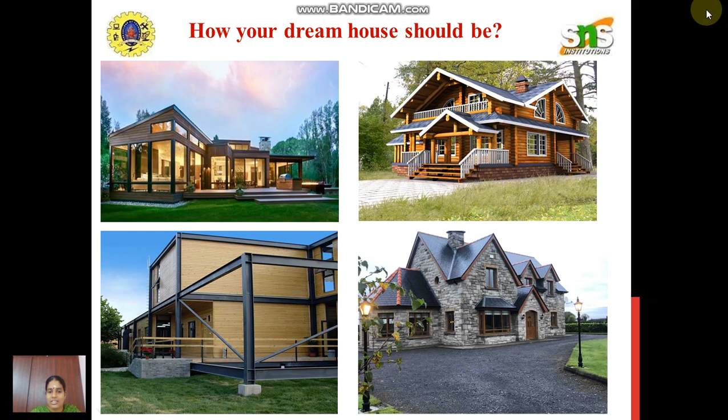Before finalizing your rooms and the size of the building, you should buy the land. For each and everything, you should know what materials are available in the market, and which are affordable for us or not. So for that, we are going to see what building materials are available in the market, by watching this video.

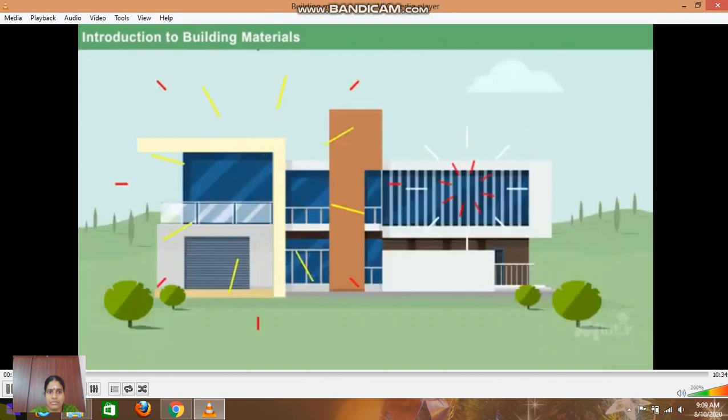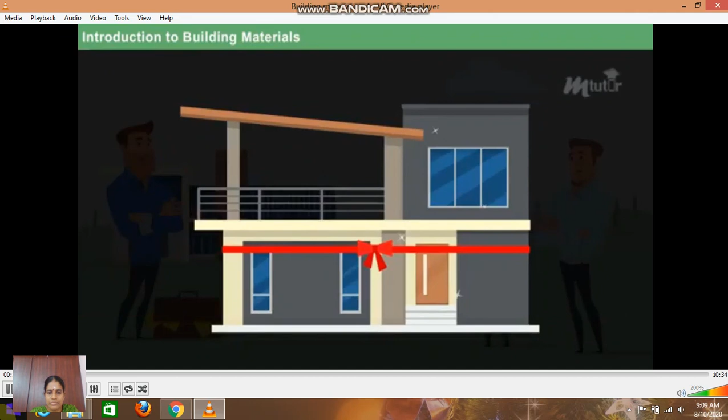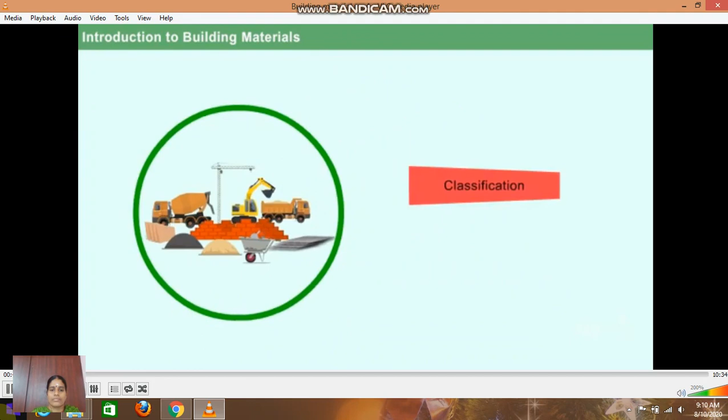Everybody who wishes to settle in their life dreams of building their own home. An average person spends half of his earnings building his own house. In this process, some succeed while others do not, due to the cost of construction, especially in buying construction materials. Selecting the right construction materials is one of the toughest tasks of a construction engineer.

Hence, he or she has to know the classification, performance, and economics of the building materials. Only by being aware of this can an engineer use construction materials in a sustainable manner. As a future engineer, are you ready to learn about this? Come on, let us dive in to learn the common building materials in detail.

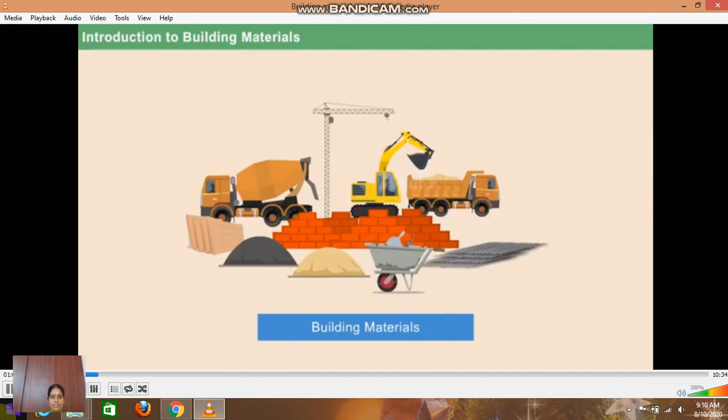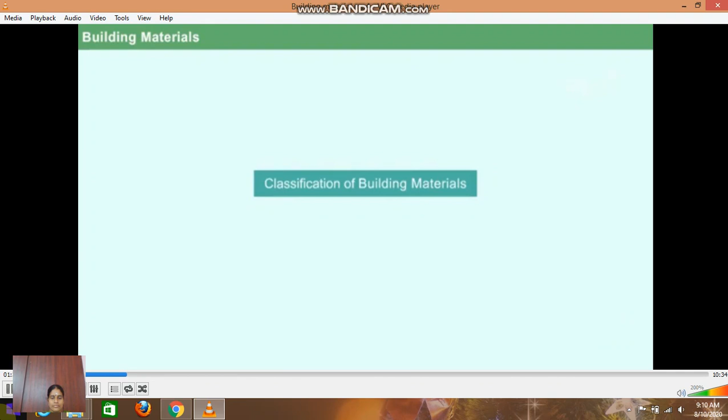Building materials are the materials used to construct any civil structure. With the help of these materials, several civil structures are constructed such as buildings, dams, skyscrapers, towers, etc. These building materials are broadly classified into two main categories: natural building materials and artificial building materials.

First, let us learn about natural building materials. The building materials that are available naturally are known as natural building materials. Some of the common examples are mud, stone, sand, wood, leaves, lime, and fibers.

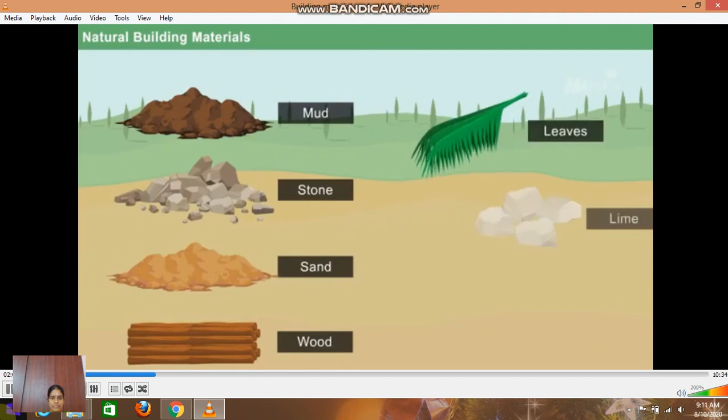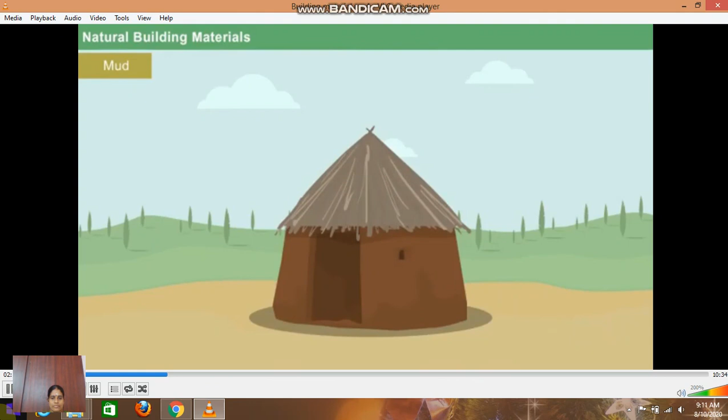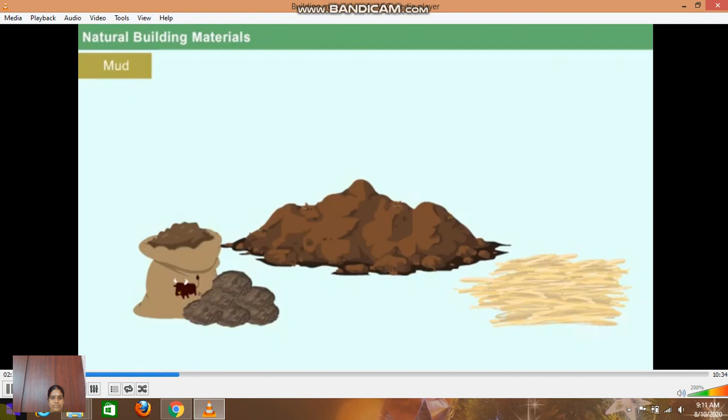Mud: In the early stages, when people started to build houses, mud was one of the first materials they preferred. People used mud along with cow dung and chopped straw to build the walls of their houses. Still, this concept of construction is used in wall cladding and flooring of modern construction. Moreover, the combination of mud and cement provides excellent durability to the finishing surface.

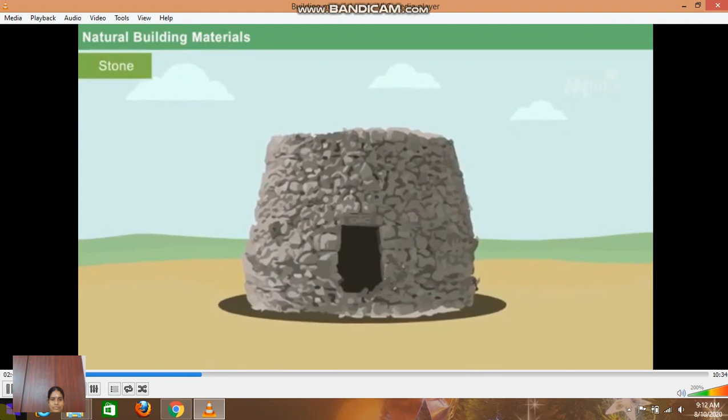Another important construction material is stone. It has been in use since ancient times. It is widely used in different components of a building such as walls, floors, foundations, roofs, etc. Usually, stones are obtained from natural quarries and processed to put into use. Some of the stones commonly used today are granite, marble, sandstone, limestone, etc.

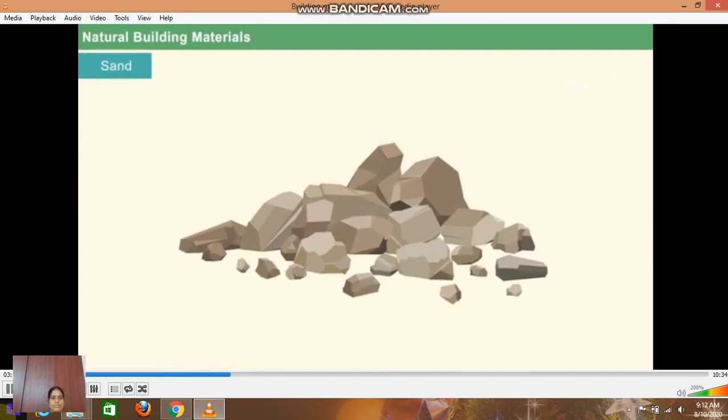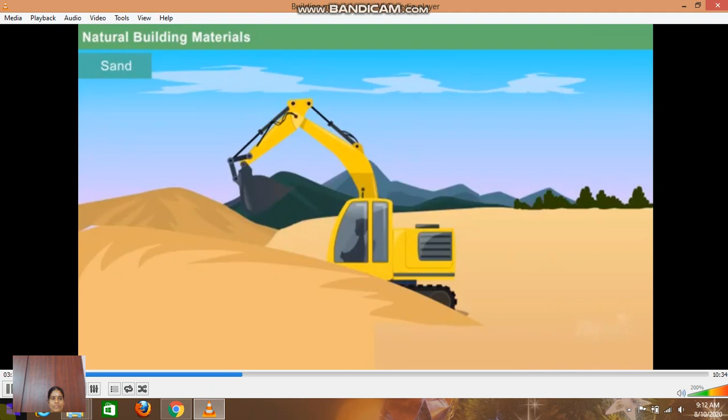Sand: With the effect of rock disintegration, small grains of silica are produced, subsequently forming sand. The source of sand for construction is usually pits and rivers. Sand is used to create many building materials such as concrete, mortars, plasters, etc.

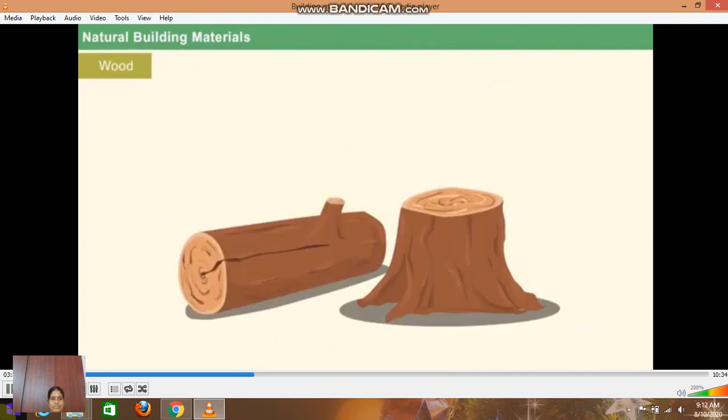Wood, nature's most abundant material, is one of the most important building materials in all periods.

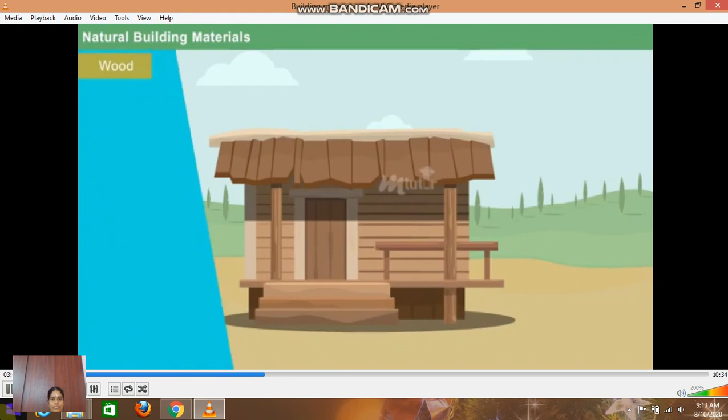The main sources of wood are deodar, teak, and bamboo trees. People use the wood mainly for the construction of windows, doors, ceiling, roofing, etc.

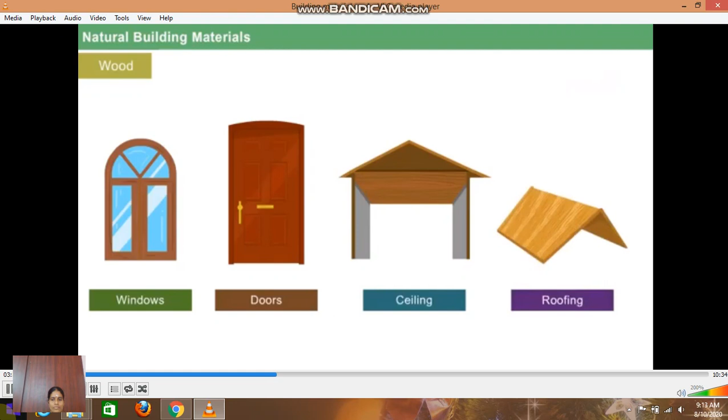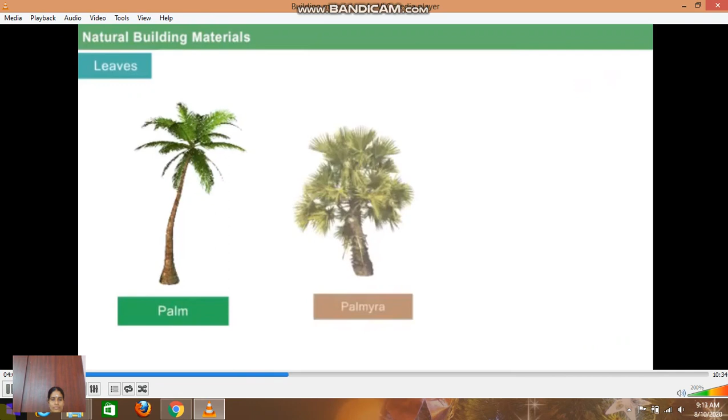With the help of leaves, people construct a temporary roof structure in their houses. Palm, palmyra, and coconut trees are the major source of leaves for construction.

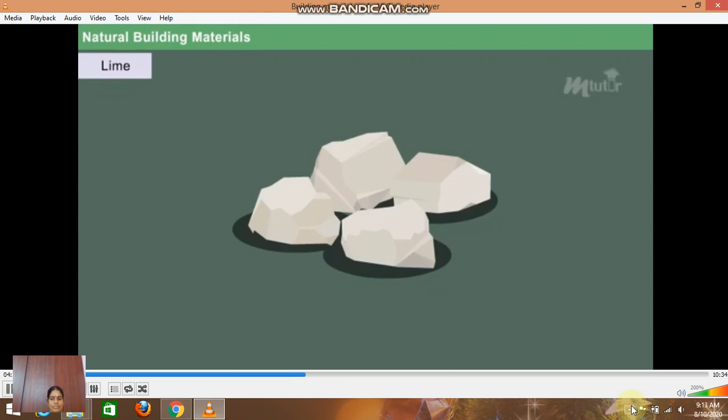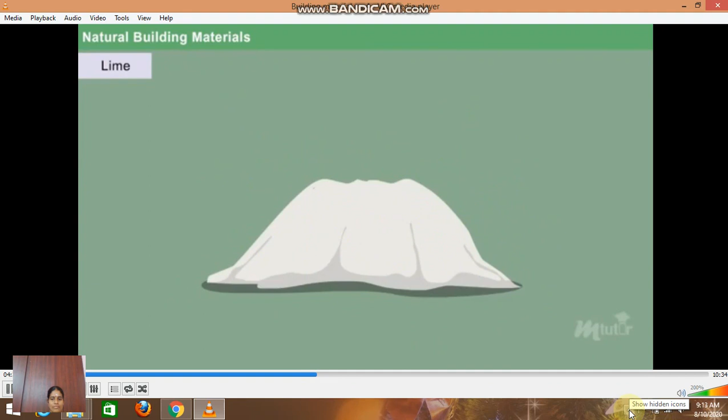Lime, due to its various benefits, is nicknamed nature's cement. From ancient ages, lime has been used in various constructions such as palaces, monuments, temples, bridges, etc. Though lime got replaced by cement in most areas, it continued to serve in economically weak areas. In building constructions, it is used as a damp-proofing material in floors and roofs.

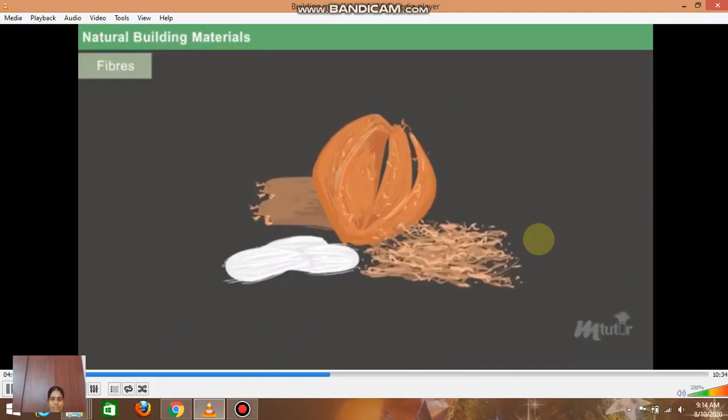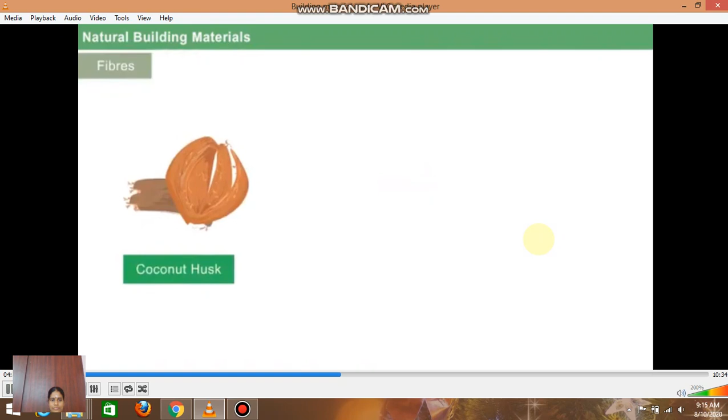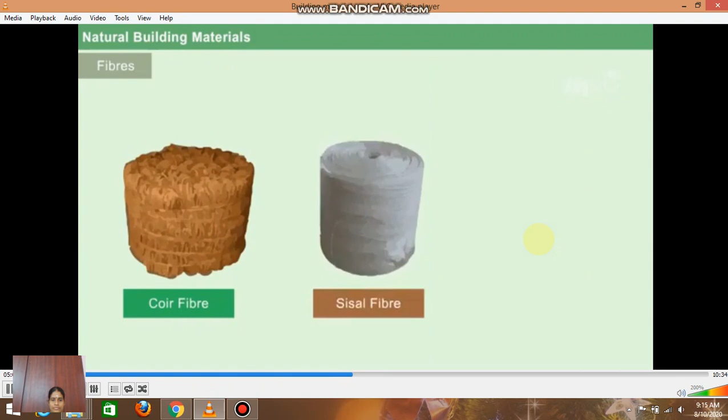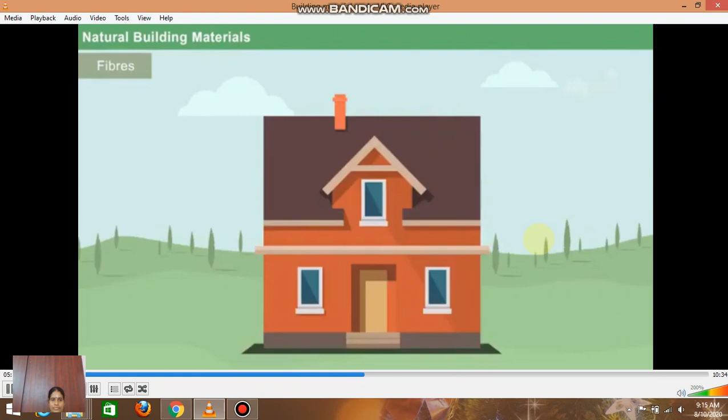Since ancient days, various types of fibers have been used in construction. Some major sources are coconut husk, jute fiber, banana leaves, etc. Commonly used fibers in building construction include coir fiber, sisal fiber, and bamboo fiber. The main use of fibers is to arrest the growth of cracks when used in reinforced cement concrete. They are also used to improve soil properties.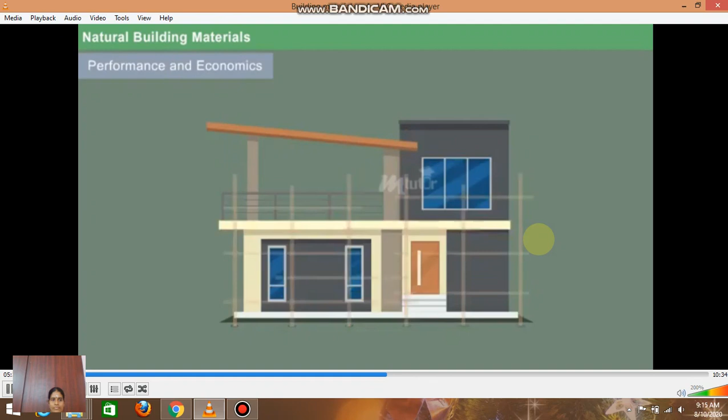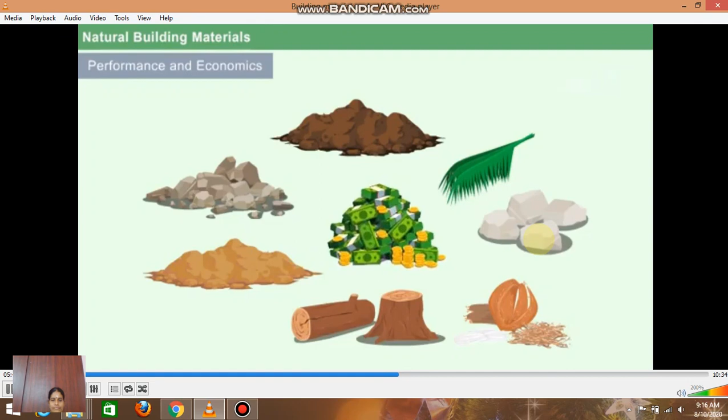Performance and economics of natural building materials: most natural building materials have good durability due to their natural origin. Apart from that, they are easily accessible, easy to repair and maintain, and help maintain a stable temperature irrespective of seasons. Since such materials are naturally available, natural building materials are very cheap compared to artificial building materials. But they soon started becoming extinct, which paved the way for mankind to invent artificial building materials.

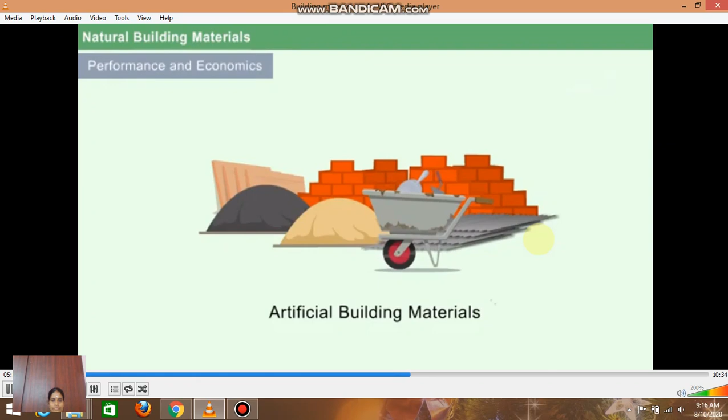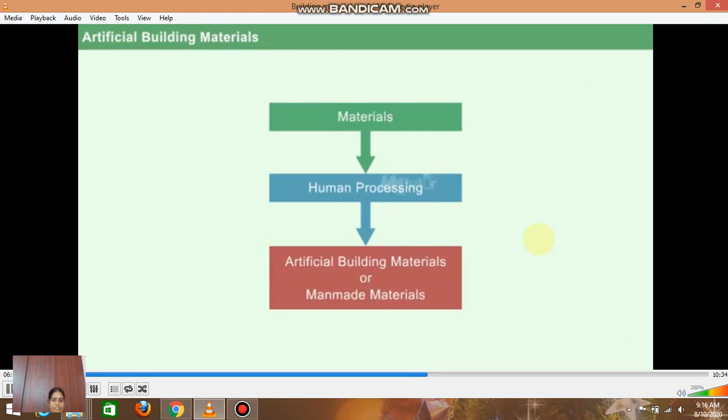Now let us discuss the artificial building materials. Materials that undergo human processing are known as artificial building materials or man-made materials. Some examples are cement, brick, tiles, glass, metal, plastics, etc. Let us now discuss them one by one.

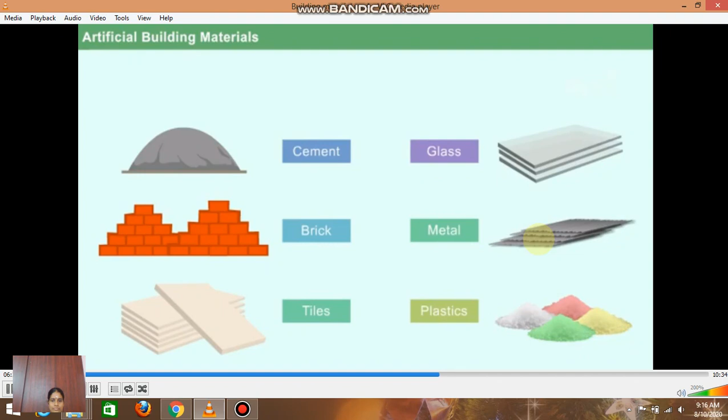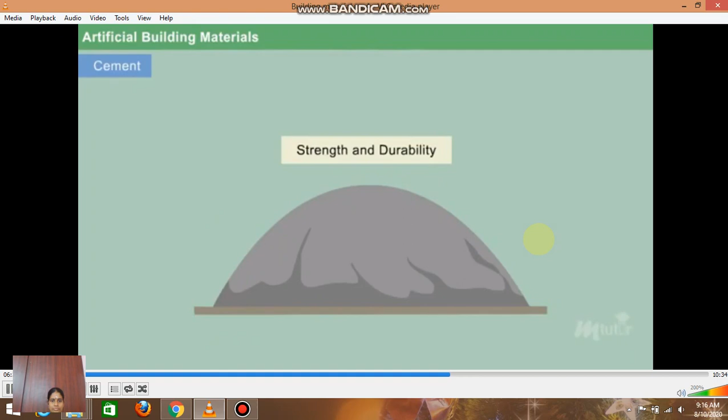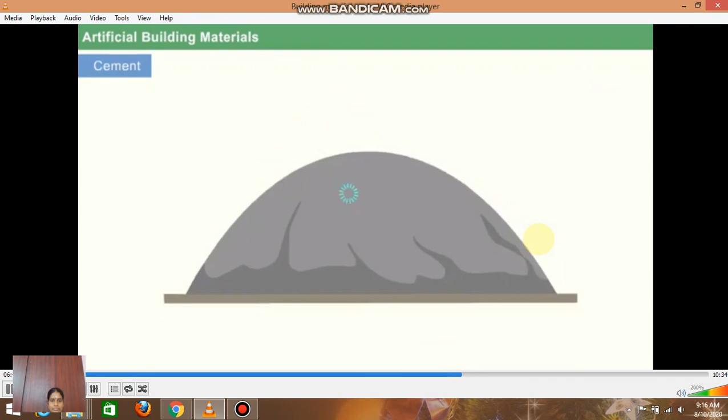Cement is widely used in constructions today for its strength and durability. It has the ability to bind together loose particles such as gravel and broken stones. One of the main features of cement is its quick setting property, which made it the most famous building material. It is used in the construction of literally all civil structures.

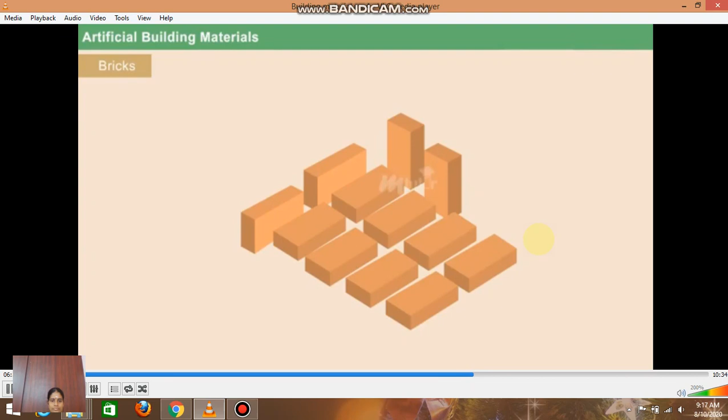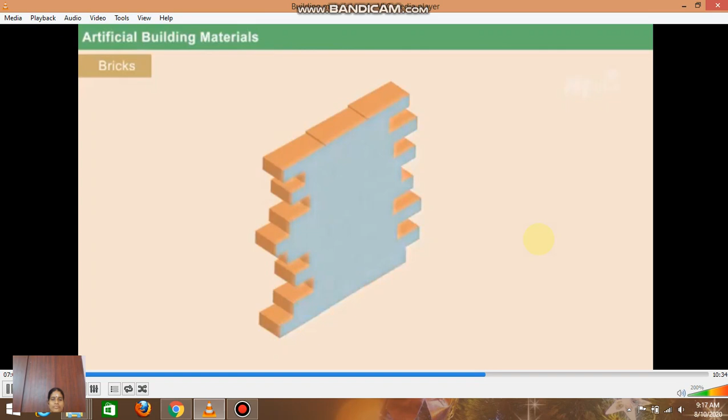Bricks, another extensively used material, are made up of kiln-fired materials like clay. Good insulation property against sound and heat is the most important quality of brick. Moreover, we can attain several shapes and sizes in bricks through molding.

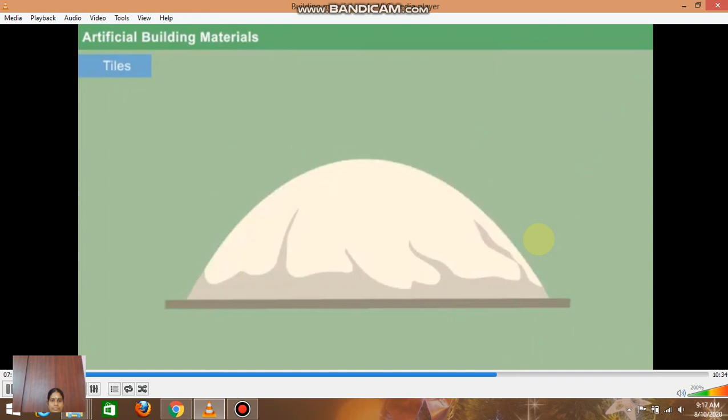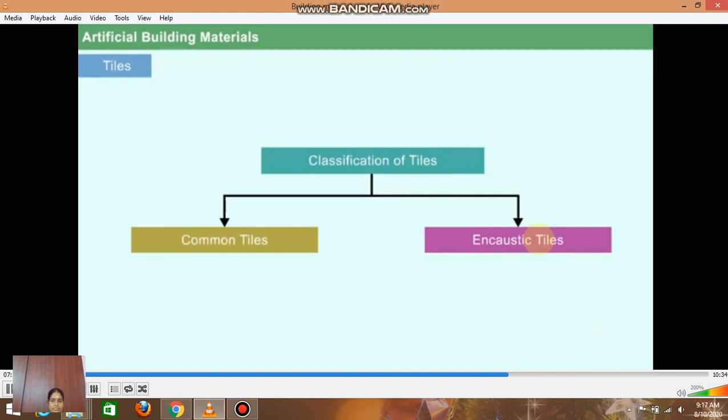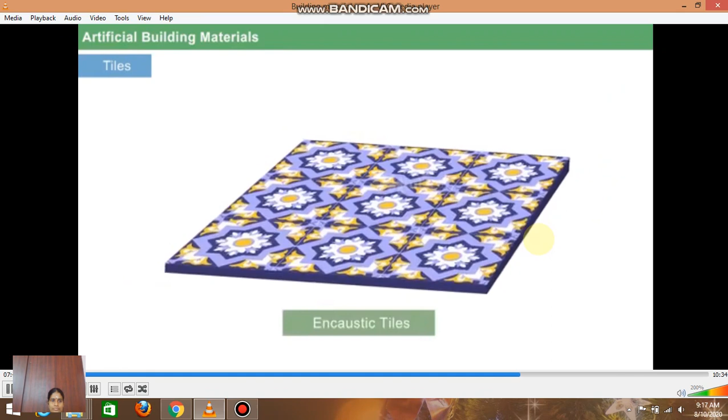Tiles are produced using hard-wearing materials like ceramics. Based on application, tiles are classified into two types: common tiles and encaustic tiles. Tiles used for paving, flooring, and roofing are common tiles, whereas tiles used for decorative purposes are known as encaustic tiles. Some examples of tiles are roof tiles, pot tiles, and floor tiles.

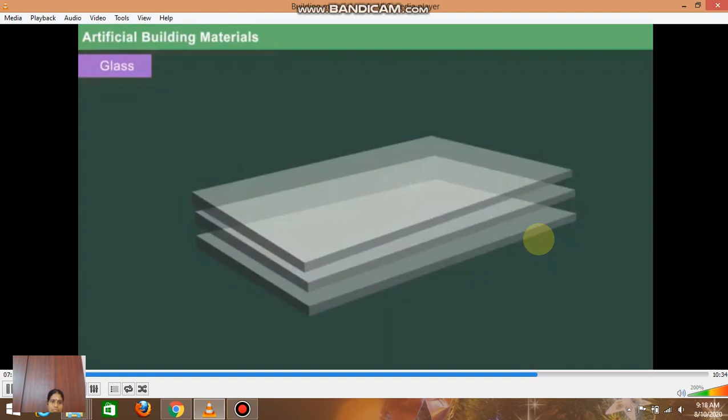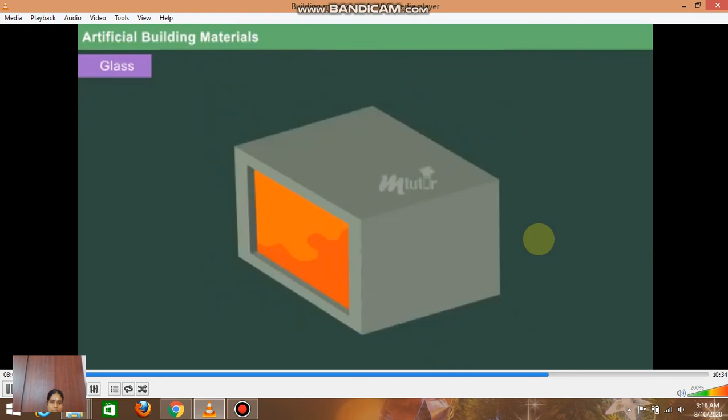Glass is manufactured by heating soda, lime, and sand. It is widely used as a construction material for glazing doors and windows in the form of tempered glass. Tempered glass is produced by heating a glass plate followed by a sudden cooling process. Moreover, glass is further used for soundproof partitions.

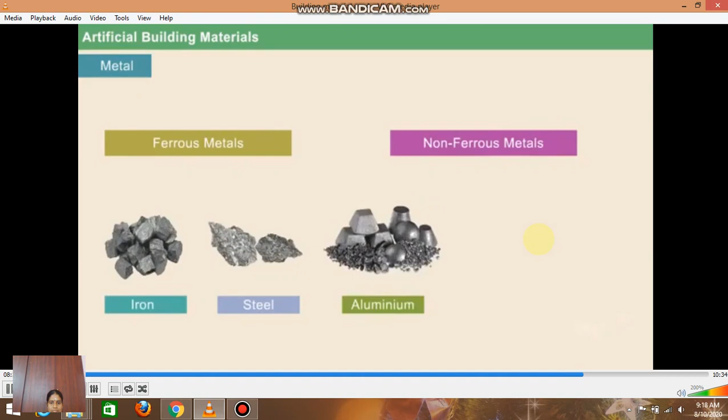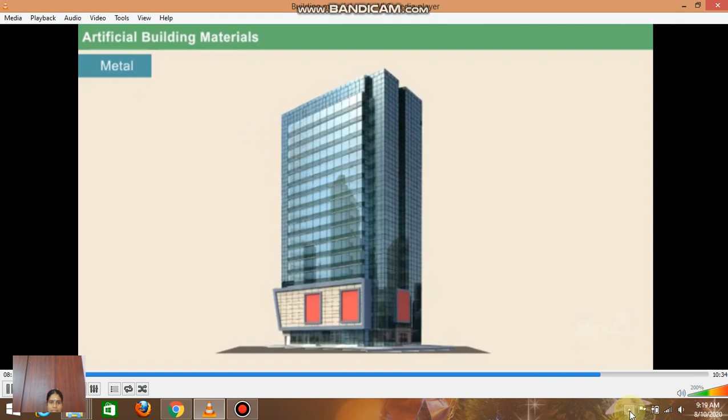Metal is one of the important backbones of all construction products and its sub-products. Metal is used as a construction material in two forms: ferrous metals and non-ferrous metals. Ferrous metals consist of iron and steel, while non-ferrous metals consist of aluminium, copper, and zinc. The most generic example is steel rods, commonly used in reinforced cement concrete. Aluminium is used along with glass in facade type constructions, commonly seen in modern skyscrapers.

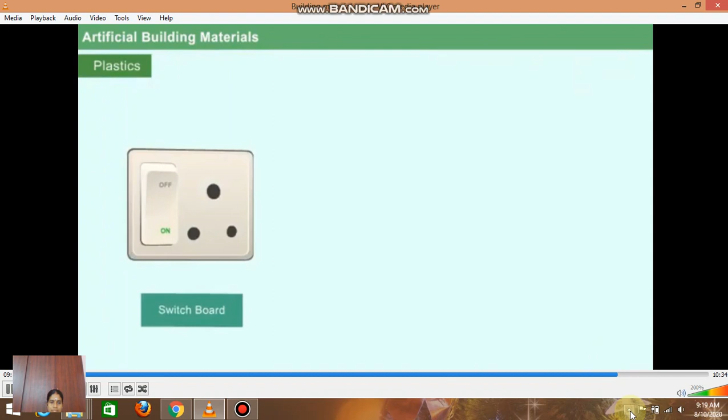Plastic is the most important versatile material in today's constructions. Based on requirements, plastics are available in various forms such as switchboards, taps, and domestic furniture.

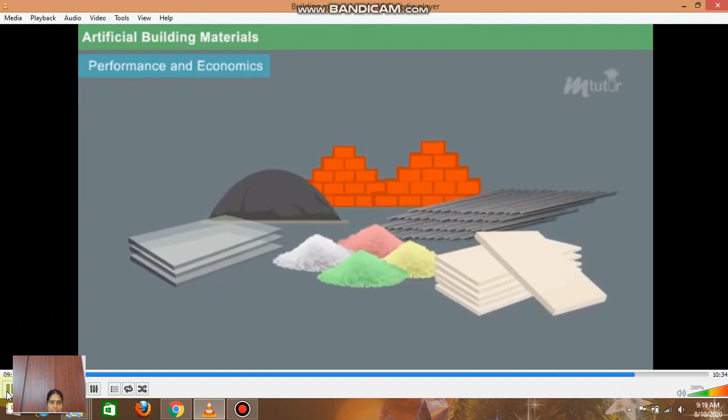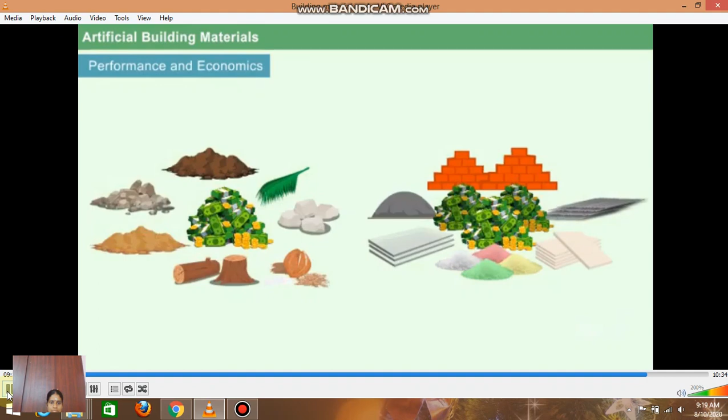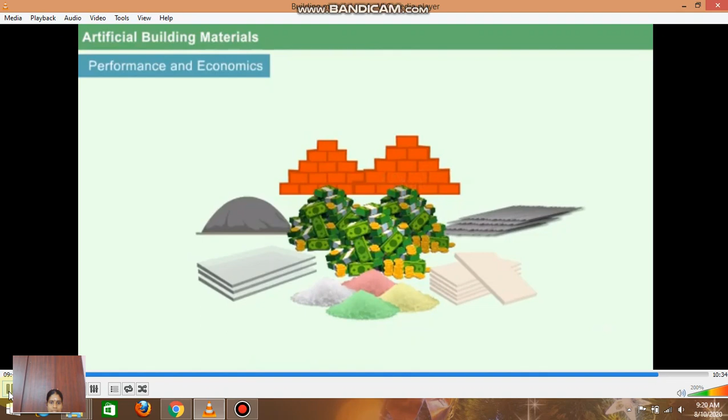Some of the factors to be considered while selecting building materials are utility, durability, availability, ease of maintenance, and cost.

Summary: so in this video we have seen what building materials are available, whether natural or artificial. I think you now know what materials are used in the construction of any building. These are all the normal used materials, and beyond this, we use some materials for upgrading our buildings. So these are all the basic materials, and we have seen how natural materials behave and how artificial materials behave.

Due to the degradation of natural materials, we are now mostly using artificial materials. For making these artificial materials, we are not using natural materials anymore; nowadays we are using industrial byproducts. To reduce pollution, we are using industrial byproducts for making artificial materials.